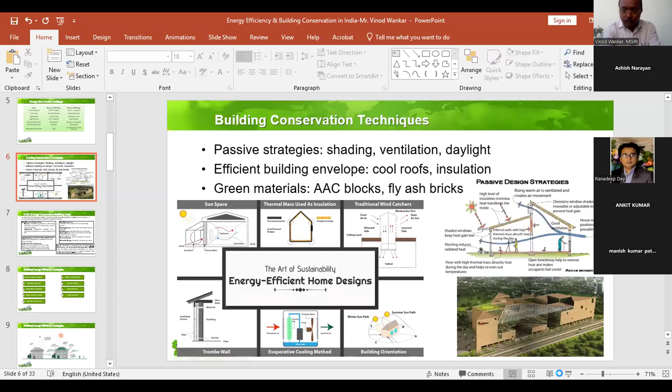Is it visible, the screen? Yes, sir, yes, sir, it's visible. Good afternoon, everyone. Myself, Vinod Wankar.

I'm working as a senior scientific officer at Rural Craft and Engineering Division in Mahatma Gandhi Institute for Rural Industrialization, Wardha. We are a National Institute under the Ministry of Micro, Small and Medium Enterprises, Government of Bharat. So today I'll deliver my lecture on energy efficiency and building conservation in India.

So before I start, I'll just share one thing. Maybe my video is not visible to all as I'm in the middle of some other workshop, so I'll just stop sharing my video. But my screen is shared with all members.

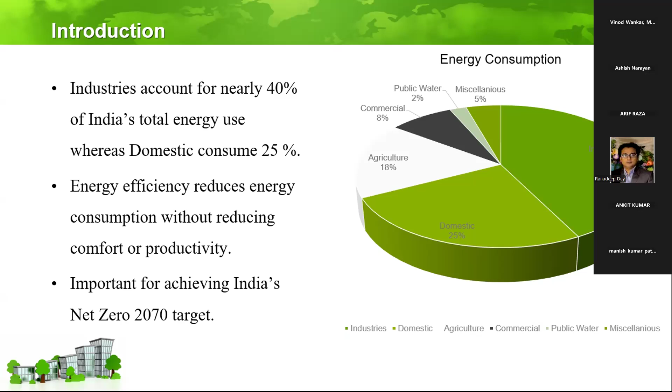Now, why do we require energy efficiency, or why does energy efficiency matter in India? As we know, urbanization means crowds are moving from villages to cities for jobs and better livelihood, so energy demand in cities due to urbanization is very high.

According to the Energy Information Administration, the average annual change in building energy consumption in India is very high compared to any other developed or developing country. Among countries that are members of the Economic Cooperation and Development (OECD), South Korea has the highest percentage at 1.4%. Now what does this percentage indicate? It's cumulative — meaning if a building consumes 100 kilowatts of energy in the current year...

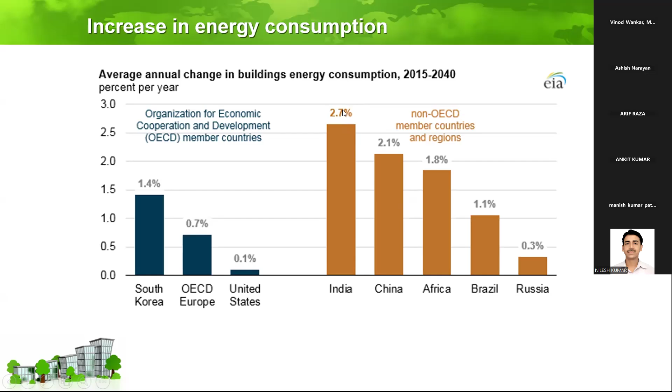Also, per capita energy consumption in India is increasing rapidly. In 2006-07, it was 672 kilowatt hours. Now, as per the latest CEA audit data up to 2022-23, this has risen to 1331 kilowatt hours. So per capita energy consumption is also increasing rapidly in India.

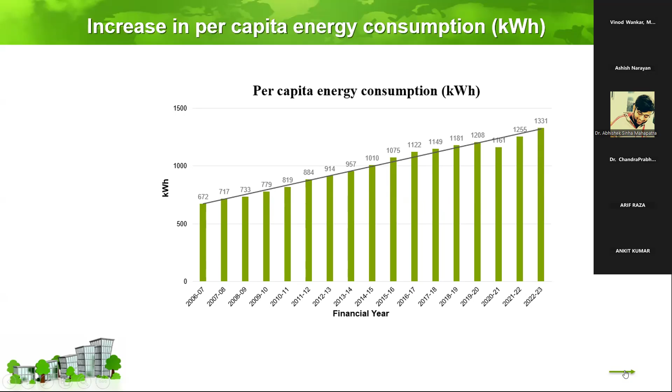Another reason why energy efficiency matters is the rising electricity tariff. The tariff shown here is for Maharashtra state — we know every state has its own different tariff. In Maharashtra, the tariff is 4.2 to 5 rupees per kilowatt hour, and this is only for 0 to 100 kilowatt hours of energy consumption. I'm staying in Nagpur, a tier-2 city, where initially for 0 to 100 kilowatt hours the tariff is around 5.6 rupees, and for the next 101 to 200 kilowatt hours, the tariff is around 11 rupees. So you can see the difference — this is another major concern.

Rising electricity tariffs are another concern driving the use of energy efficient equipment or practices. Now, apart from urbanization and electricity tariff cost impact, another factor is the environmental and climatic impact.

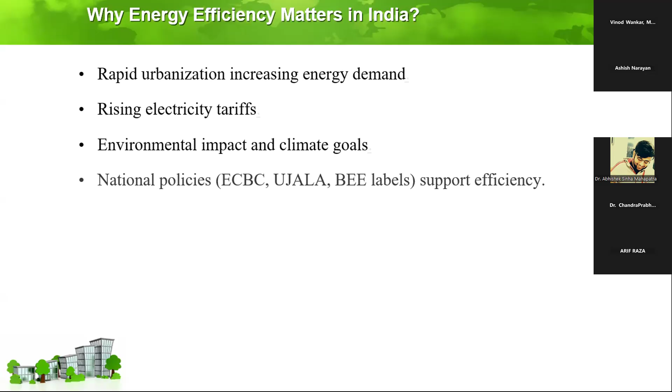Now, these are some summaries of energy used in India's buildings. I'll divide this into various factors like primary energy use, lighting share, appliance load, energy demand timing, insulation and efficiency, and energy efficiency potential. Whatever data I'm sharing here is from the Bureau of Energy Efficiency's data.

We all know that in commercial buildings, industries, or IT offices, HVAC and lighting are the main energy consumption, with the major share owned by HVAC and lighting. Whereas in residential buildings, we use fans, ACs, and other electrical and electronic supplies like televisions and refrigerators. In India, we are not that fond of using heaters like European countries, but as generations progress, we may use that facility more, becoming a major share in coming days.

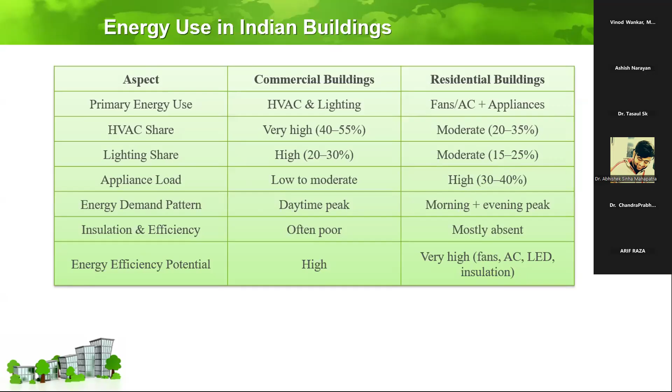Now, there are various building conservation techniques, like passive and active strategies. So now we discuss the passive strategies.

In old days, we observe that homes and residential houses are built very much based on astronomical architecture, their locations, and the positions of doors and windows. So astrologically, we construct our homes based on that, and also based on the materials.

As I'm working in the rural craft and engineering department, I frequently visit various tribal belts and areas in villages as we look after the rural industries. They describe resources which do not last long with us, like coal or steel, as very limited resources. We are using them, and maybe by 2050 or 2060, these resources will diminish with time.

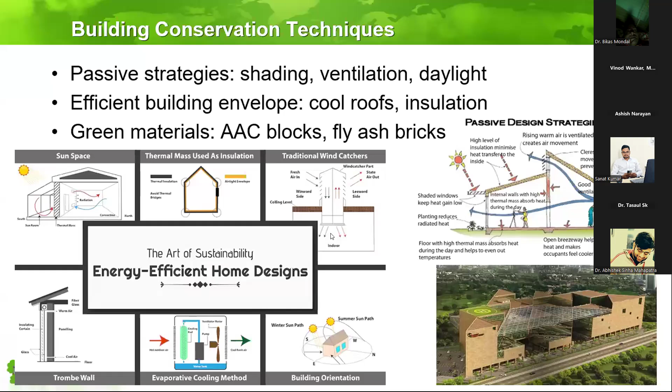Is this video visible to all? No sir, not visible. Okay, let me share. Now it's visible. Yes sir, visible. Yes sir.

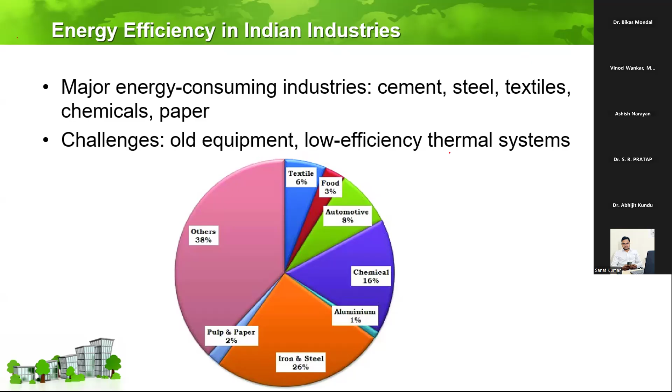Now likewise, we know that regular thermal power plants, whether coal-based or other, have maximum efficiency of around 29 to 32%. The remaining is waste. So to increase efficiency, nowadays various waste heat recovery systems are used, or exhaust gases are used for reheating or preheating. Then high efficiency motors like IE3 or IE4 are used, which are very high efficient.

Then there's decomposition of collected waste or reuse of that waste into the system, automation and process optimization, and efficient boiler and steam systems. As I told you earlier, replacing old boilers and steam systems costs very high. Still, companies are replacing old boilers or old systems with new ones, because the payback period is less compared to using the old boilers or old systems.

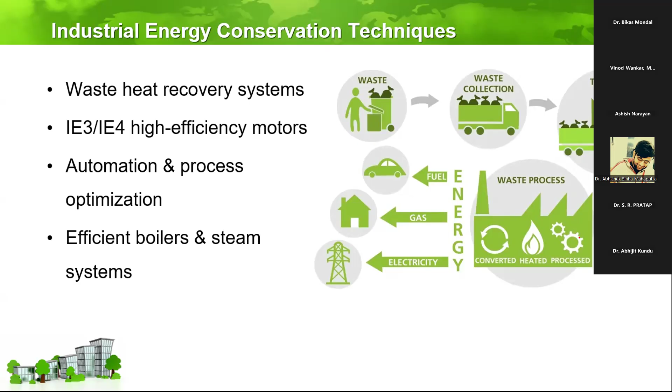We are moving on to the next very important scheme that government of India launched in 2012, known as the PAT scheme, which is launched by the government of India, Ministry of Power, and it is monitored by the Bureau of Energy Efficiency.

The scheme is launched in 2012, and it has given some targets to some designated consumers, some industry saving targets. By saving energy above that target, industries can earn ESCerts, ES meaning energy saving certificate, and they can then trade these energy saving certificates.

So I just told you some of the points on why this PAT mechanism is used. PAT mechanism is used for improving energy efficiency of energy intensive industries. Specific high energy intensive industries are identified initially, and they are called designated consumers.

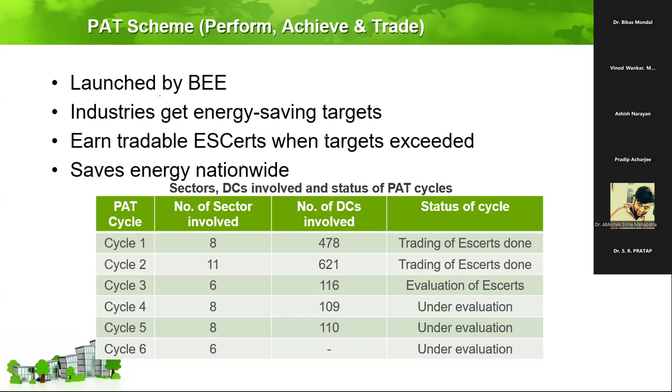Moving to the green building part, let's start with what is green building. Green building is a practice of designing, construction, and operating buildings efficiently and environmentally responsibly throughout their entire life cycle.

Green building doesn't mean only installing solar energy or wind or using renewable energy. Green building means using maximum natural light, conserving natural resources, using water harvesting techniques, designing for resource efficiency, using energy efficient materials while constructing, and reducing greenhouse gases. By using all these techniques, the comfort of human beings or animals is also maintained. All this together forms the green building.

I'll give one small example: nowadays, for residential homes, people are using solar energy or solar panels under the national solar mission. So the main reason most people are using this is the subsidies.

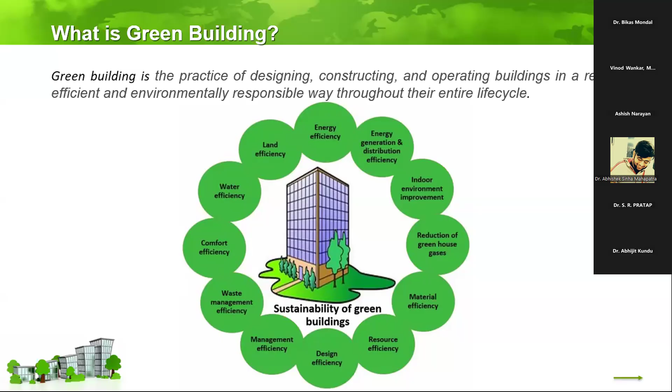If they use one or two ACs, then electrical heaters also they are using. Due to this, the energy consumption also increases. This is not a practice for the green building. When we say we follow the practice of green building, that means apart from installing this renewable energy, we also reduce our energy consumption. So this is the main concept of green building.

Now, why is it so important? While construction of any house or building, say a 2,000 square feet home, we typically produce 4,000 kgs of waste during the land filling or construction materials, and this is very high as compared to the waste produced by a normal home. Second, the building consumes more than twice as much energy as all cars.

Not only the energy consumption but indirect pollution also. It accounts for 68% of total electricity consumption of all residential. Then we, meaning buildings, use around 80% of total drinking water consumption. Now, that 80% of total drinking water includes unnecessary water consumption also.

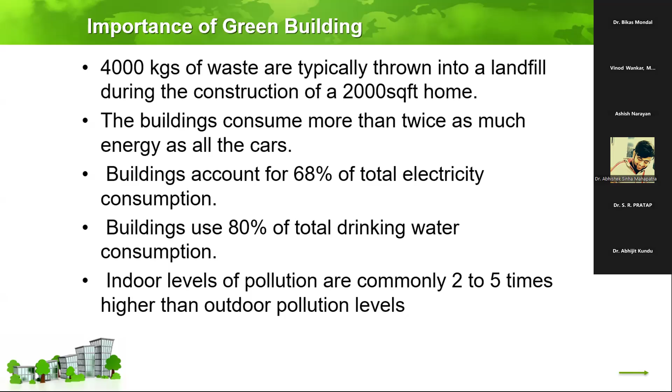Like instead of that, we use showers for bath, so unnecessary water is used during showering or other household applications also. And this increases indoor pollution 2 to 5 times more than outdoor pollution.

Now, construction waste, as I told you, is 10 to 30% of municipal waste streams. To reduce this, generally nowadays any architecture or civil engineering, most of them follow the 5R practices for eco-friendly fashion. What is 5R? So reinvent, repurpose, recycle, repair, reduce.

These are the 5 R's while constructing any building. If you follow these 5 R's, definitely we produce energy efficient buildings, and it also helps protect our environment. So these 5 R's include reduce, reuse, recycle, repurpose, and reinvent. So what does it mean?

It means a building design based on standard size and material. Instead of using customized size, if you go for standard size materials, wastage of these materials is also reduced. This will form mostly with bricks. The laborers or contractor generally cut out the bricks, and most of the bricks become wastage, so there is also wastage of material and cost.

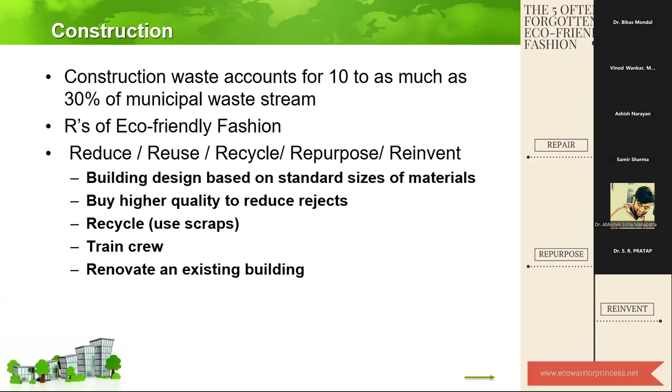Another point, instead of traditional materials, go for engineered, recycled, or reclaimed materials. Energy efficient placement of doors and windows - we can use materials like bamboo. Nowadays, various husk or biodegradable materials are also used to manufacture doors and windows. Glass energy efficient windows are available nowadays, which can cool the buildings during summer and maintain comfortable indoor temperature during winter also.

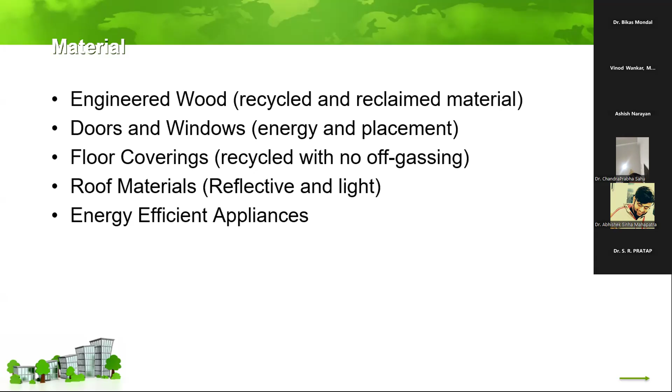Now, what are the benefits of these green buildings? We categorize these benefits in 3 parts: social benefits, environmental benefits, and economical benefits. Social benefit improves our quality of life, health and comfort by using modern appliances or practices.

If you go for recyclable material or energy efficient construction sites, it will definitely increase our health and comfort, and quality wise also it's good. It also reduces the strain on the local infrastructure.

It helps to protect our biodiversity, improves air and water quality, reduces waste and conserves and reserves resources. While construction of green buildings, cost is very high, but the payback period is very less, and it helps optimize the life cycle economic performance and improve occupant productivity.

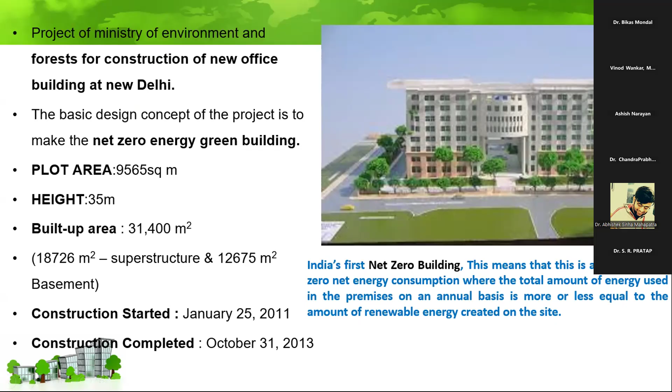This means it is a building with zero net energy consumption, where the total amount of energy used on the premises annually is more or less equal to the amount of renewable energy created on site. That's one reason it is called a net zero building. It also uses water harvesting, ventilation and lighting systems, making it a sustainable building.

Major achievements include 40% saving in energy, zero electricity billing, 55% saving in water. At that time it had the largest rooftop solar power system in any multi-story building in India, around 930 kilowatts. This building is rated 5-star by GRIHA (Green Rating for Integrated Habitat Assessment) by MNRE, Leadership in Energy and Environment Design India, and Platinum by the Indian Green Building Council rating.

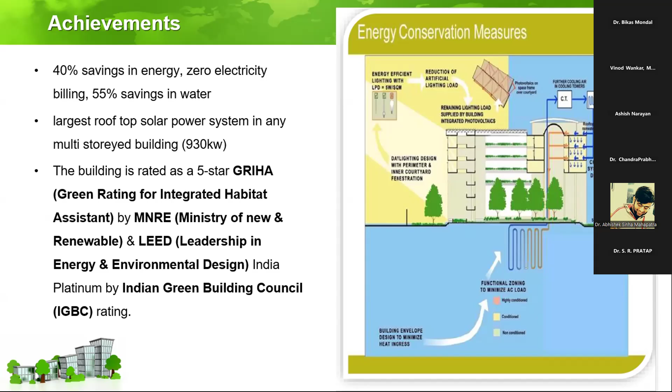During building planning and design, they used drip irrigation: native species for shrubs and trees having low water demand in landscaping, low lawn area to reduce water demand, and use of treated water for irrigation to reduce water use.

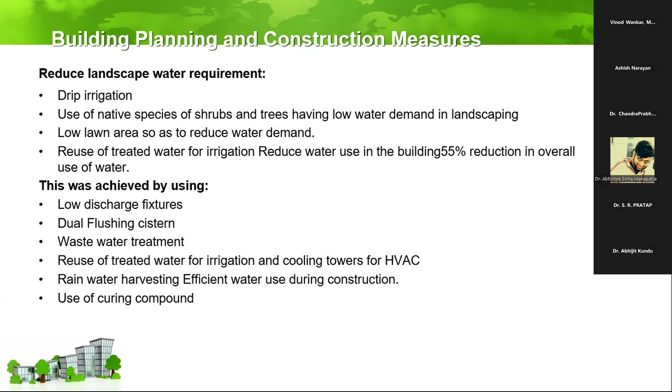In the building, there was a 55% reduction in overall water use, achieved by using low discharge fixtures, dual flushing, on-site wastewater treatment, reuse of treated water for irrigation and cooling towers for HVAC, efficient water use during construction, and use of curing compound. They followed all the ECBC norms while constructing the building.

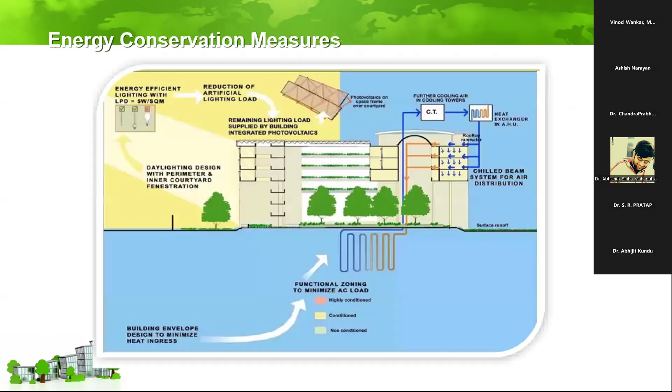Here are some glimpses of the design. There is stone available in nearby areas used for flooring - terrazzo flooring with locally available stone material, jute-bamboo composite for door frames and shutters, UPVC windows, and high-reflective terrace tiles. They avoided aluminium.

They used an old Indian technique, sandstone jalis for air circulation, which kept the building temperature 5 to 10 degrees lower than the atmospheric temperature. They also used fly ash lime gypsum bricks, AAC blocks in construction, and high efficiency glasses.

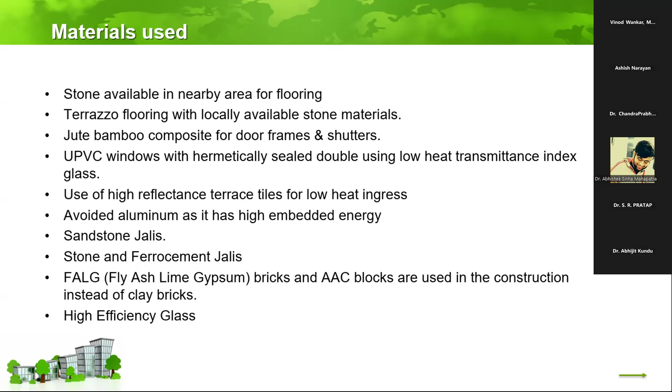I'd also like to share that in our organization, MGIRI, we have a division known as the Rural Energy and Infrastructure Division, where we give training on manufacturing of LED bulbs. I'm happy to share that there are women from Maharashtra, Leh Ladakh, and the Northeastern region who have set up their own businesses producing LED bulbs.

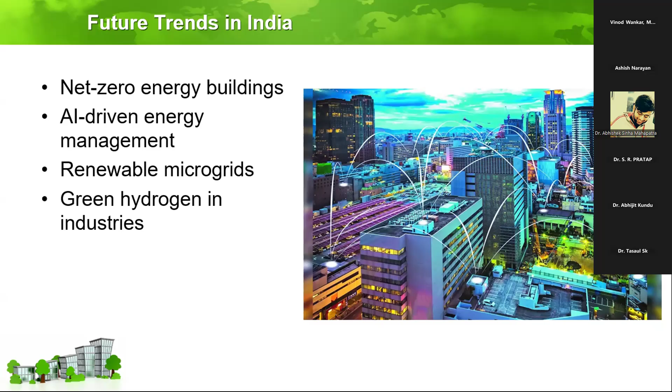Now we come to the conclusion. During all these sessions, we conclude that energy efficiency is not only key for India, but it is also required for India's future and our future generations.

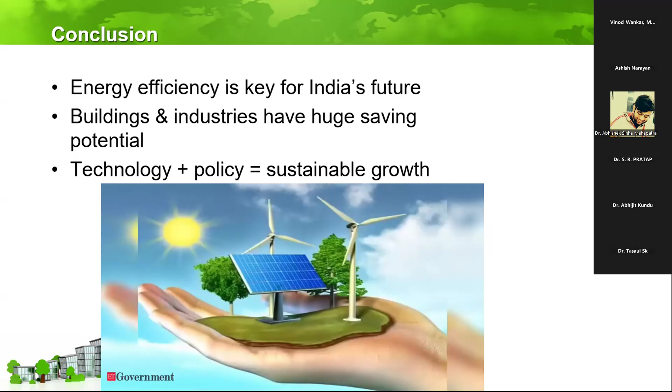Buildings, whether residential or commercial, and industry, have huge potential in India to save energy. How do we achieve this? We may achieve it through technology, government policies, and also from our Vedic system, which gives us sustainable growth.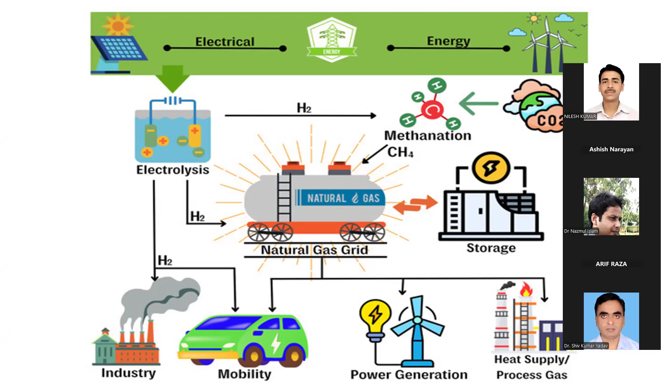In this slide, we can see renewable energy sources like solar energy and wind energy, including photovoltaic solar farms and rooftop panels for solar, and onshore and offshore turbines with large scale grids for wind. This also includes geothermal, tidal, hydro, and hydrogen. The existing power sector includes thermal power and hydropower in existing mode, but when we use renewable energy sources, we have to optimize and connect several types of renewables in a sector. In the next slide, we will see how we can optimize this system and relate it to get maximum profit in the power industry.

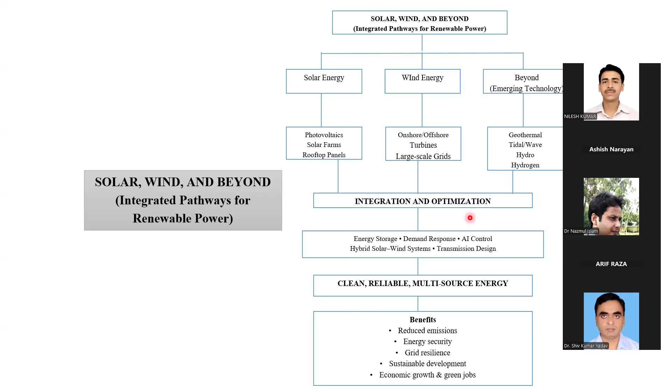The power industry is moving away from fossil fuels to cleaner renewable sources like solar and wind to generate electricity. This reduces the greenhouse gases that lead to climate change, and when this clean energy is used to charge electric vehicles, it further reduces emissions compared to traditional gasoline powered cars.

When we use electric vehicles, there are some parameters to consider. EVs are not just consumers of energy, their batteries can also be used to stabilize the power grid. They can store renewable energy from periods of high production, like solar power during the day, and release it during periods of high demand, like in the evening, reducing strain on the grid. This is called vehicle-to-grid and grid-to-vehicle power, and both operations are very important to consider. This allows electric vehicles to actively sell power back to the grid, providing a valuable revenue stream for owners while supporting grid resilience.

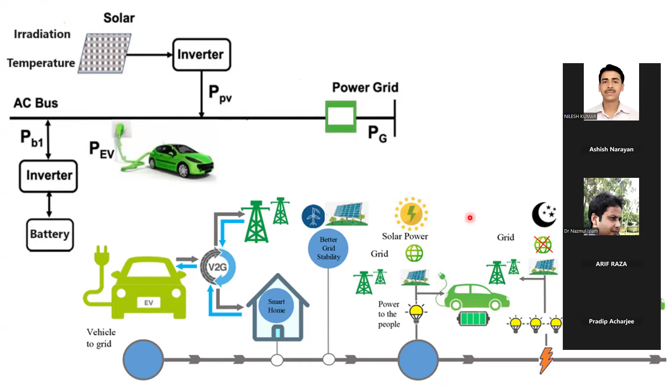The combination of renewable generation and electric vehicle charging creates a virtuous cycle. Renewable energy sources like solar panels can be co-located with electric vehicle charging stations, allowing for self-sufficient charging that doesn't put additional strain on the grid. This approach ensures that the transportation sector becomes part of the solution for decarbonization rather than being a major source of emissions. Every solar panel has its own capacity, as per specification, to convert solar energy into electrical energy.

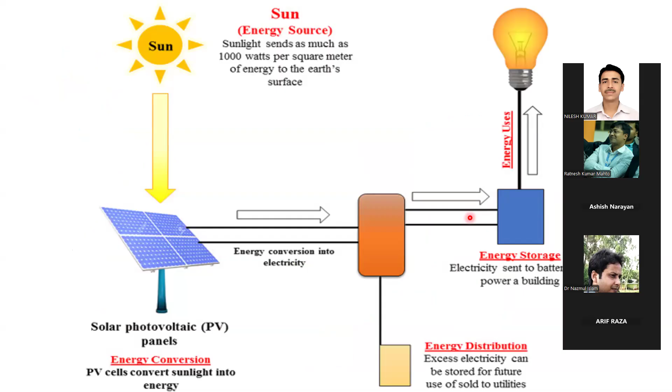The synergy between renewable energy and EVs is a major driver of innovation, advancing battery technology, smart charging infrastructure, and grid management systems. This also creates new industries and jobs, contributing to economic growth and sustainable industrialization.

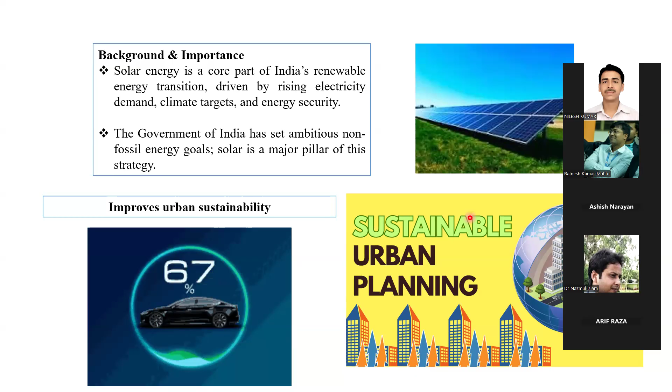There are several environmental benefits of using clean and green energy. In urban areas, a shift to EVs powered by renewable sources directly improves air quality by eliminating tailpipe emissions, leading to better public health outcomes. Electric vehicles are connected to clean and green energy for sustainable development through their ability to significantly reduce greenhouse gas emissions, improve air quality, and reduce dependence on fossil fuels, especially when charged with renewable sources like solar and wind power. This synergy between electric vehicles and clean energy contributes to sustainable development by mitigating climate change, promoting technological innovation, and creating a more resilient and healthier transportation system.

The environmental benefits also include reduced emissions. Electric vehicles produce zero tailpipe emissions, unlike gasoline and diesel cars which release harmful gases. When charged with electricity generated from renewable sources, they achieve a much lower carbon footprint and help combat climate change. Eliminating tailpipe emissions also leads to cleaner air, especially in urban areas, which can reduce respiratory disease and improve public health.

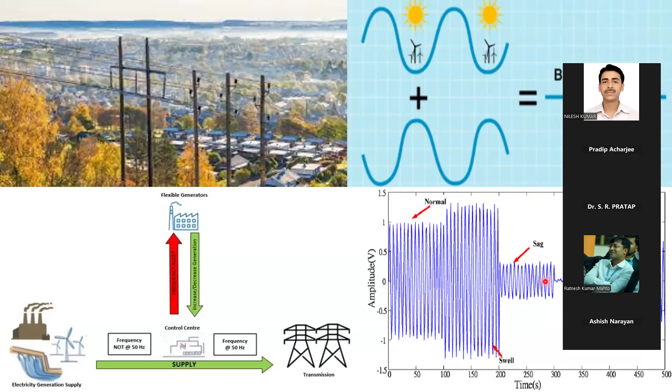In this slide, we can see the power quality differences. In this graph, there are several types of power quality differences: normal, then swell, then sag. In the next slide, we see several types of power quality differences. Basically, when we generate power it goes from the generating station to the distributing station, and in between, the main part is transmission.

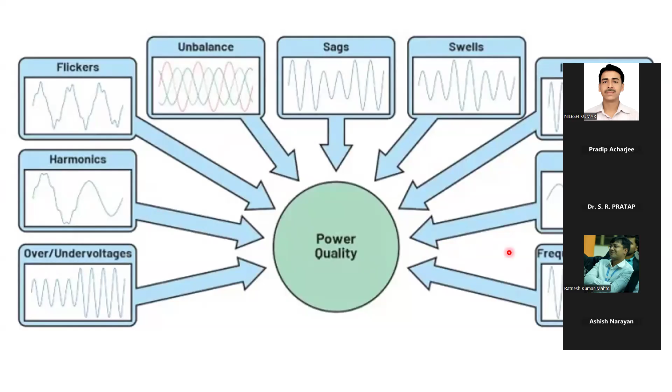At this time, we have to maintain the power qualities also. So how we can maintain the power? There are several types of disturbance, like flicker, harmonics, overvoltage, unbalance, sag, swells, frequencies, notches, etc.

The main thing is that we need to gain the profit. So how we can gain the profit? By using renewable energy, and when we consider vehicle to grid and grid to vehicle operation, including electric vehicle, plug-in electric vehicle or hybrid electric vehicle. So basically, how we can control and meet the energy demand or load demand per day, while maintaining the profit of industries.

So how is this possible? Let's go over some overview on that topic. Nowadays the size of the power system is increasing day by day due to the heavy load demand. There are several types of sectors like agricultural, industrial, commercial, residential, and due to this, the power system is growing.

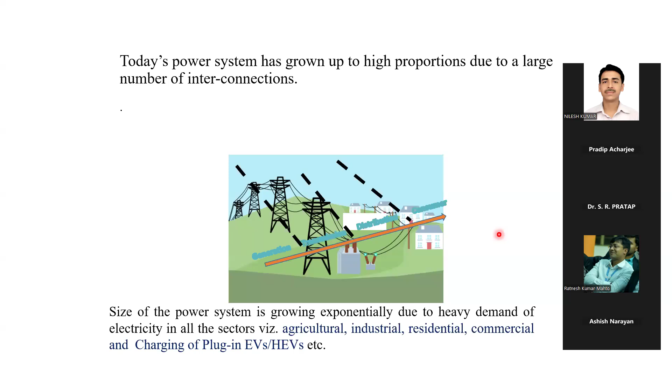So if the power sector is growing day by day, then it is basically necessary to decide for the power generating station which generating unit should be kept on for a particular hour, and for what hour it should be kept off, to meet the time varying load demand. After that, we have to maintain the optimal generation cost also.

So basically, what is that? Every generating station is made up of several power generators which are connected in parallel mode. After the parallel generating connection, not all generators are in on condition for all time, and not all generators are in off condition for all time. So we need to decide which generators will be in on condition and which generators will be in off condition to meet the time varying load demand.

So how many generators we need to switch on and how many we need to switch off, how can we decide this, to meet the time varying load demand? This is one parameter, one factor we need to decide, and by deciding this, we need to gain the profit of our industry. So how can we do this? Let's see.

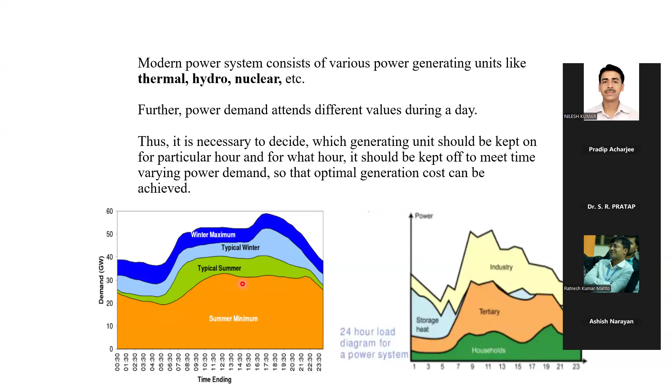Another portion is like this. In this graph, we can see in case of renewable energy sources, there are several types of demands - in summertime it will be one pattern, and in winter time it will be another. Solar uncertainty also has to be taken into consideration. By considering this, and also considering other power plants, we need to know when there will be peak load demand, when there will be base load demand, and what will be the power demand in case of winter and in case of summer.

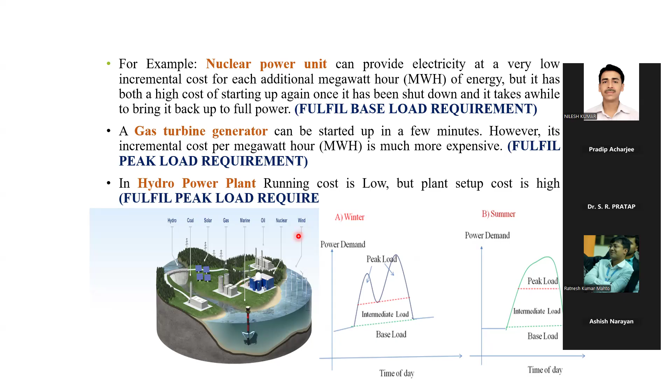So we need to maintain those things, and including generating the power, renewable energy sources play a major role in meeting the time varying load demand as well as environmental protection.

Also, it is very complicated to get the profit-based unit commitment. So what is the profit-based unit commitment problem? Unit commitment means, if we consider several generators, each a per unit generator, then which generator will be considered to be in on condition and which will be considered to be in off condition. When those generators are in on condition, we can say those generating units are in committed mode, and when those units are in committed mode, at that time they will fulfill the power demand within 24 hours by getting the optimum solution.

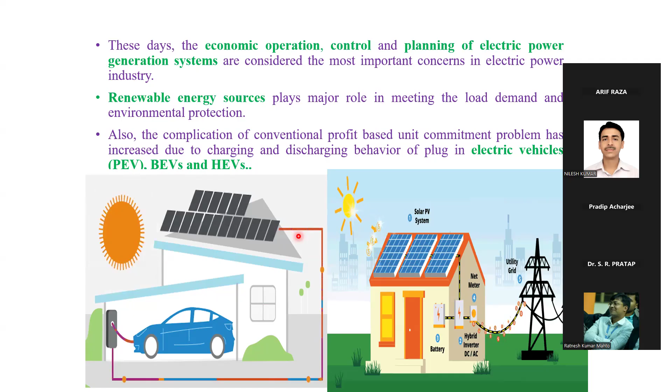And what is the optimum solution? Optimum solution means how the power sector or power industry can gain profit from that. So we need to maintain all those things.

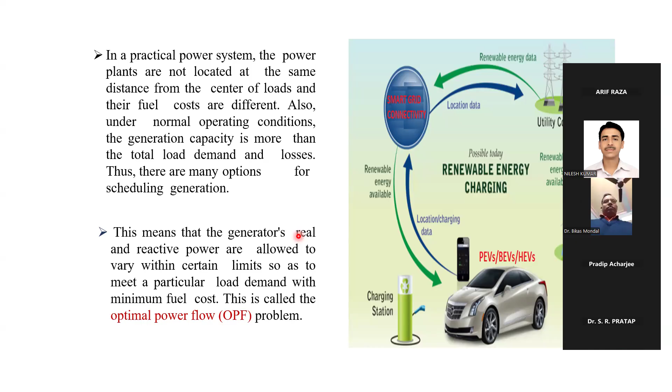Now we can see about the optimal power flow. That means the generator's real and reactive power are allowed to vary within certain limits. So when power is generated, there is a certain limit - one is the minimum limit and another is the maximum limit. We need to maintain the generation of power within the minimum limit to the maximum limit.

Maintaining the operational cost is the main factor for gaining profit. So when any industry wants to gain profit, we have to maintain the cost. What type of cost do we have to maintain? There are several costs like total fuel cost, operational cost, maintenance cost, and crew cost. All need to be maintained as constant.

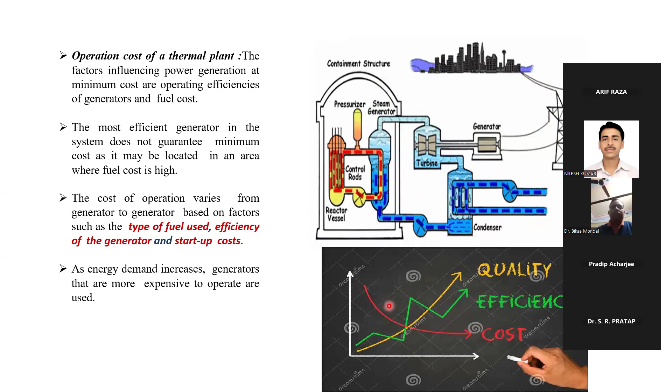The main part is that we have to maintain our cost. That means we have to lower our operational cost and increase the efficiency and quality, as well as the power efficiency.

So how can we do this? There are several types of unit commitment problems, like conventional unit commitment problem, profit-based unit commitment problem, and security constrained unit commitment problem. Among these three, the profit-based unit commitment problem is the basic concern because everyone needs the profit, and the company also needs the profit. So how can we get the profit?

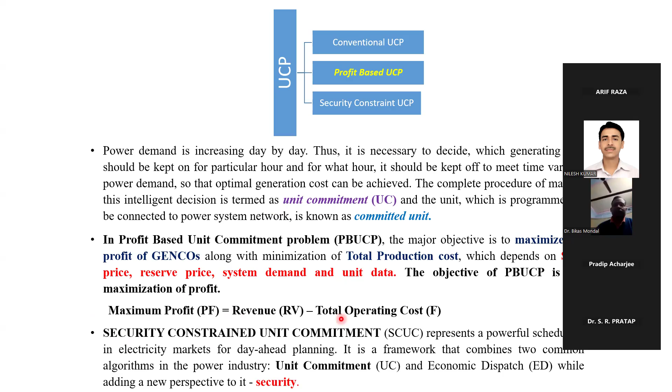This is the equation. Basically, maximum profit we can gain from revenue minus total operating cost. So the primary purpose of the unit commitment problem has changed to maximizing the total profit.

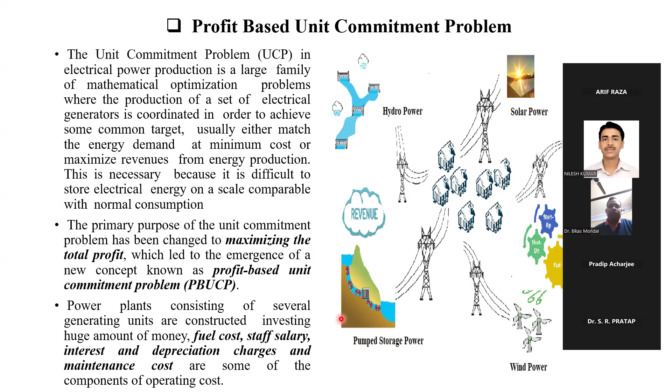This leads to the emergence of a new concept known as profit-based unit commitment. There are several types of cost like fuel cost, staff salary, interest and depreciation charges, and maintenance cost, which are some components of operating cost.

I am showing you some experimental research on this topic. So how can we maximize the profit? We maximize the profit when we reduce the total fuel cost. So how can we reduce the total fuel cost and increase the revenue?

This is the equation for the revenue part. By using this equation, we can get the revenue. If we consider H as the total interval of time in hours, and NG as the number of generating units.

We can consider delta as the energy price. P is the power generation of the ith unit at each subinterval in megawatts, and U is the status of the ith unit, or each unit, at each subinterval of time - meaning in which hour which unit is off and which unit is on.

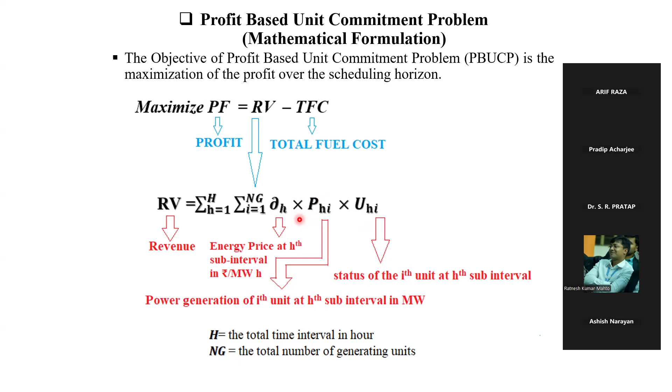We can find out the status of the unit from this. And this part is the power generating part, from which we can identify for which hour what generator is generating how much megawatt power.

In this slide we can see the fuel cost. How can we get the fuel cost? In this equation we find some cost coefficients - A, B, C, D, and E - known as the cost coefficients of the ith generating unit, where I is the number of the generating unit.

Here we can see the startup cost. When some generating unit is in off condition and then needs to turn on, the cost needed at this time is known as the startup cost. This startup cost is very important.

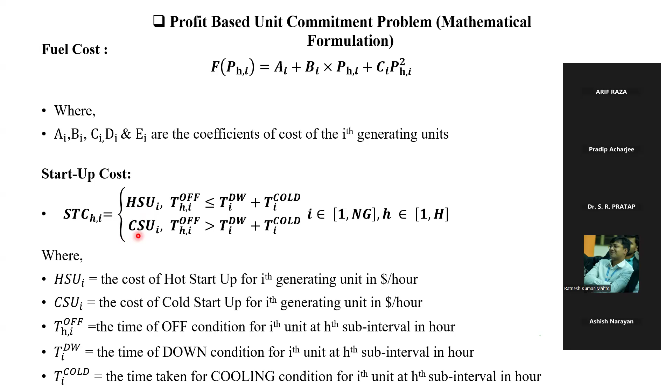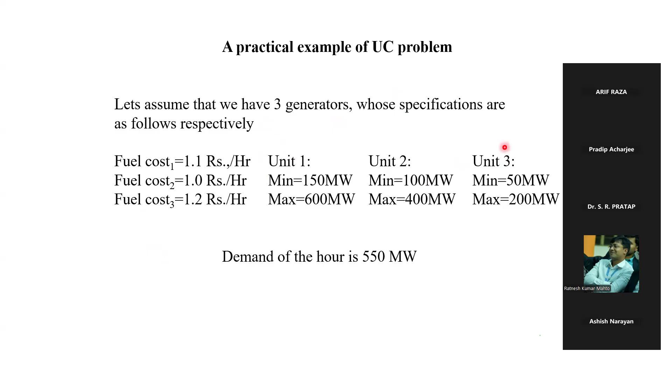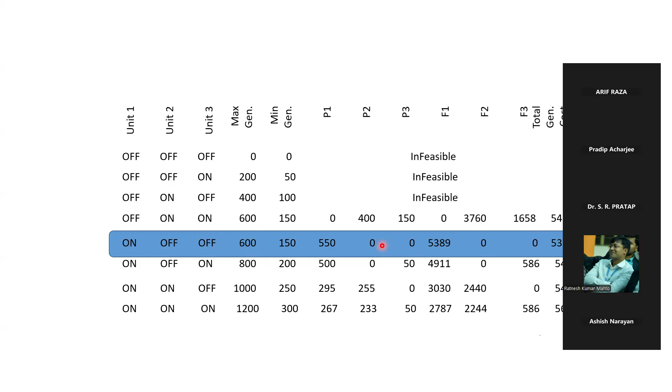Let's take a practical example of number of generating unit commitment. Here we have generator 1, generator 2, and generator 3. When there are only 3 generators, we can easily calculate which generating unit should be kept on and which should be kept off for a particular hour, and how they can meet the time varying load demand, using those formulas.

But when we have 10 generating units, how can we calculate? This mathematical manual calculation becomes very complicated. And when there are 100 power generating units at any power station, how will it be possible, up to n number of generators?

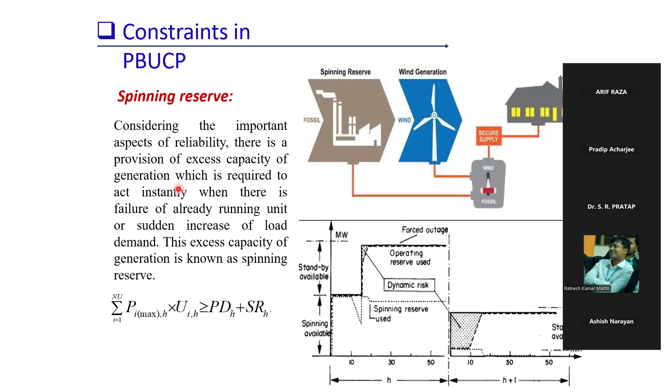We also need to maintain some constraints - some limitations, like we need spinning reserve. That means we need some generator in hand. Like when some generator is in running condition, if a fault occurs, then we need to take that generator out.